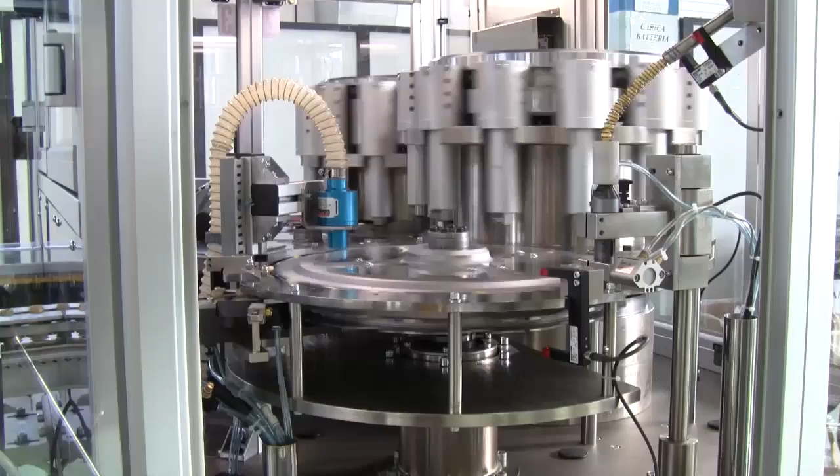Automatic assembly solutions with the latest technology, a result of the resources invested in over 30 years and know-how developed with the construction and installation of more than 600 machines in Italy and abroad.

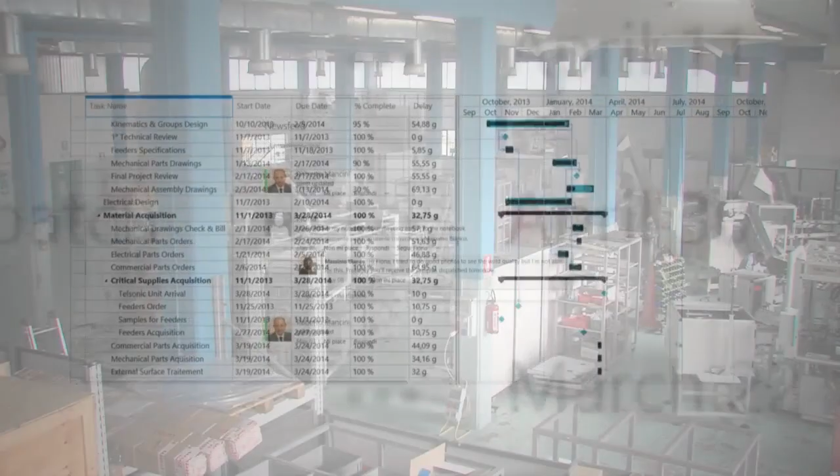Velomat has developed its innovative cloud system that guarantees efficiency. Velomat Cloud System has been developed for sharing with all the departments, as well as the client's real-time specific information and progress of the manufacturing process. This allows the project management to give support during the engineering phases and during machine construction.

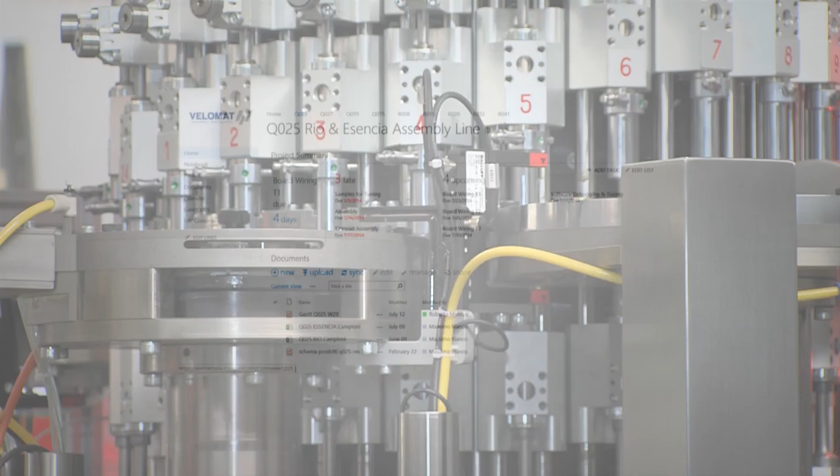Velomat Cloud System allows prompt management of any variations during construction. All of this is very important for complying with delivery deadlines and any proposed solutions able to exceed the expectations

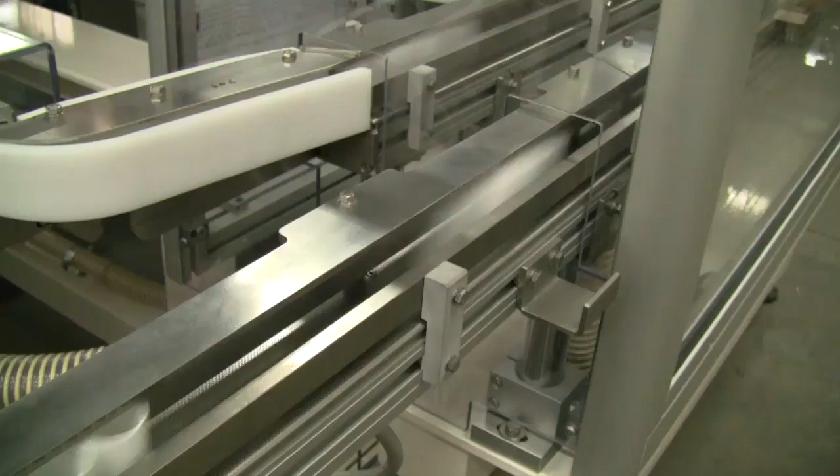of the customer. Easy to use, high production speed, high accuracy, durability, low operating costs are the benefits that Velomat guarantees to every customer through their innovative solutions and an ongoing research that has allowed the development and the availability of high reliability proprietary standard modules.

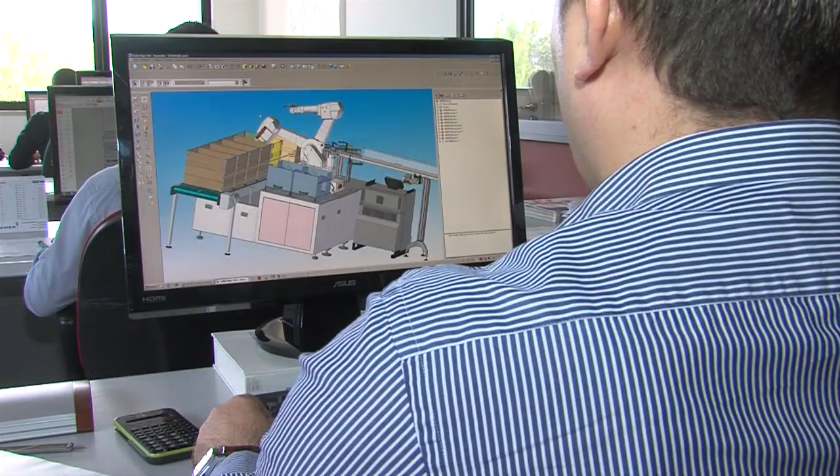30 years of experience, a young and enterprising team that designs and manufactures assembling machines as well as systems with the use of technology to ensure high performance, high flexibility, and rapid and simplified conversion procedures.

Continuous kinematics with a production rate of up to 1,500 pieces per minute. Rotating table with a production rate of up to 450 pieces per minute. Index linear with a production rate of up to 60 pieces per minute.

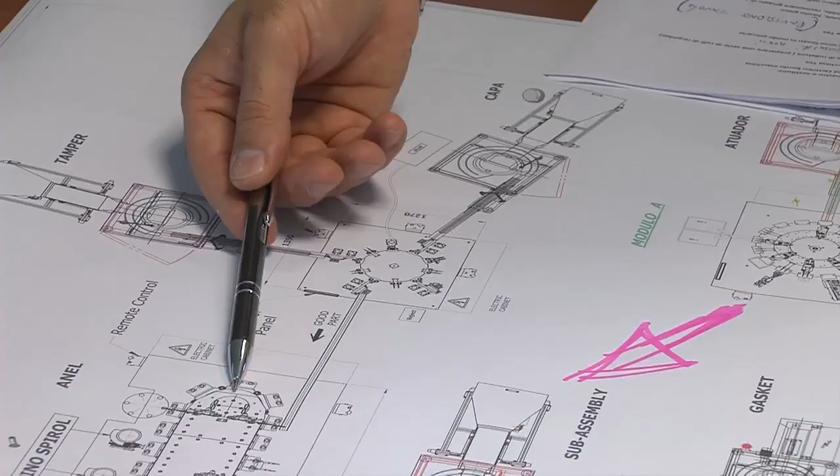Design and manufacturing capabilities which position Velomat at the top of its industry. Owned and patented assembly technologies, vision systems for operations control, leakage control systems, low maintenance costs and energy consumption, minimum inertia on moving parts, systems suitable for operation in the clean room, layout with minimum space.

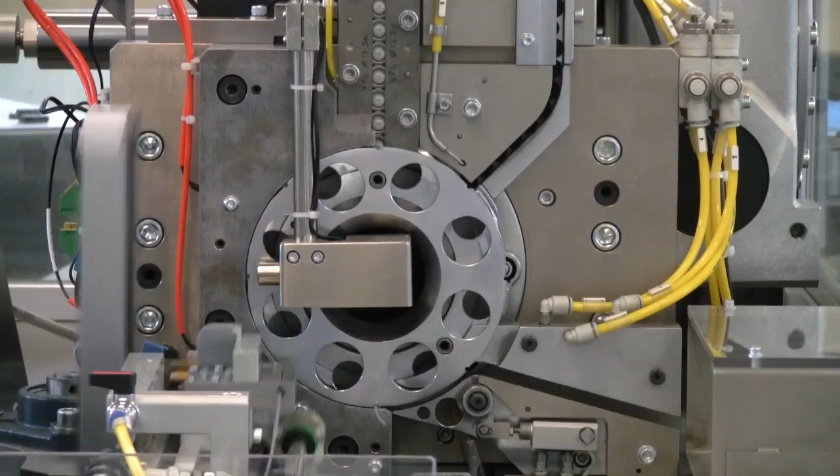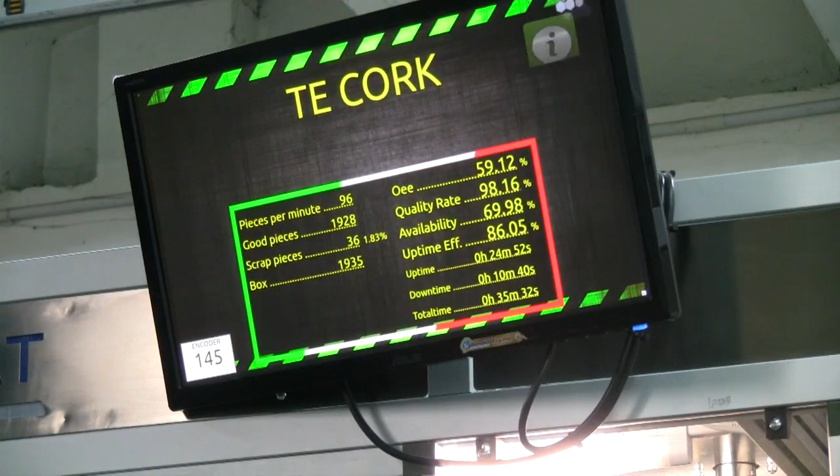The realization and the installation of each plant is followed by a thorough after-sales service that assists the client with staff training, with continuous monitoring of remote assistance, Velomat proprietary, for real-time diagnostics and function restoring, with direct assistance of specialized personnel, with a quick delivery service of spare parts.

High speed, high precision, innovative technologies, advanced controls, construction quality, high reliability, over 30 years of experience.

Velomat, assembly automation.